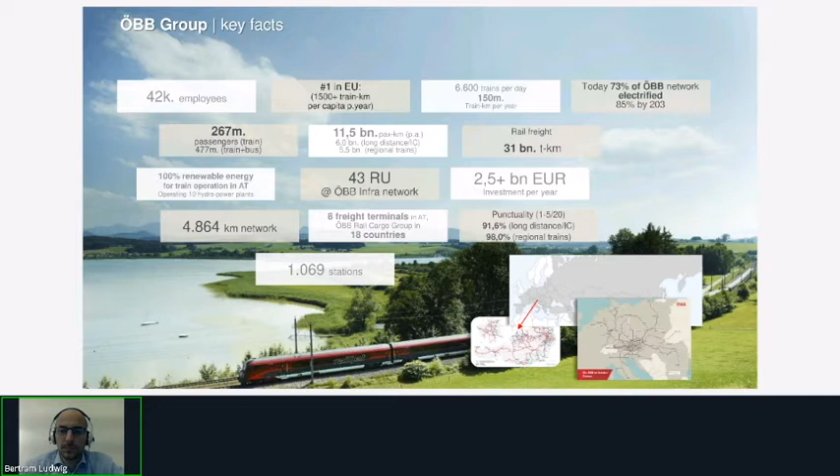On this picture, you can see our very large network going all over Europe in terms of passenger transport. And here you can see the countries where we are operating rail freight. As I said before, 70% of our railway network is electrified already. ÖBB is not only a railway operator, but also the biggest bus operator in Austria. We have about 3,500 buses operating, and we are searching for solutions in terms of buses. But we are mainly also searching for solutions in terms of railway, especially on regional railway lines.

We have a climate protection strategy until the year 2030. Our goal is to be CO2 emission neutral by 2030. How do we want to achieve these goals? First of all, railway electrification. That's what we are working on, and what we will increase. The goal will be 85% of our network by 2030.

We are searching for solutions in terms of bi-mode trains. As you can see on the left picture, this red white train is a bi-mode train from Siemens, which we have tested during the last years quite successfully, and it works for up to 60 kilometers without using its pantograph. On the right, you can see a hydrogen train, because we're working on some research and development projects where we try to green shunting trains for our freight system, as well as for our passenger transport.

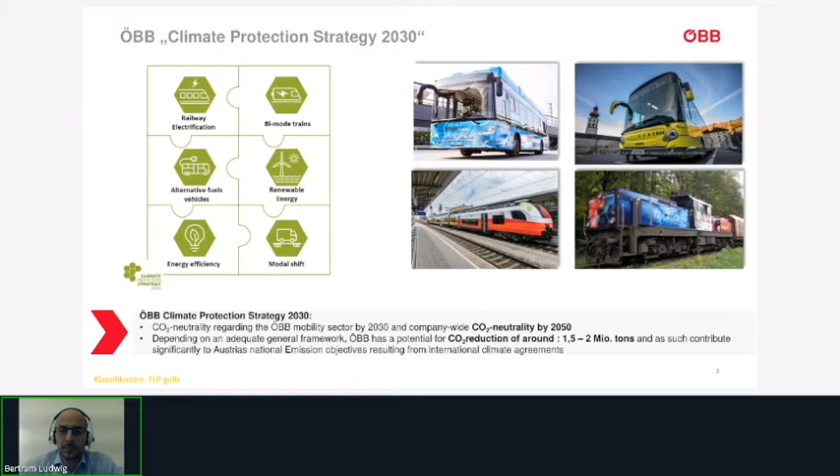So we have a very, very high goal: 2030 CO2 neutral in terms of mobility, and 2050 fully CO2 neutral. One of the tests we have carried out is a temporary test of a hydrogen train. We have been testing this train from the 19th of August to the 26th of November, so there are still a few more days left. However, I do have some bad news I will tell you later on.

However, we are testing these trains. You can see on the map of Austria here. We're testing these trains in the region south of Vienna. It's a very hilly region. It's an alpine area, actually, because until now, these trains have been mainly operated in the north of Germany, where it is flat. But it's the first time ever that these trains are operated in a hilly alpine area.

The area where this has been operated is a track which is 130 kilometers, so battery vehicles are not an option. We have tested one of the trains, and it operated daily up to 500 kilometers per day. But we have not only tested the train, we have also used a temporary fueling station for hydrogen. So we prepared all of our garages for that, and the entire railway station.

The Austrian Federal Railways is actually the first bigger railway undertaking testing of hydrogen trains. As I mentioned before, we are testing these trains mainly in alpine areas, which are currently mainly diesel lines. And it not only includes the train itself, but also the fueling station, maintenance of the train, and logistics. The goal is to gain knowledge about the train and to draw a path for how we can achieve the goal of 2030 CO2 emission free.

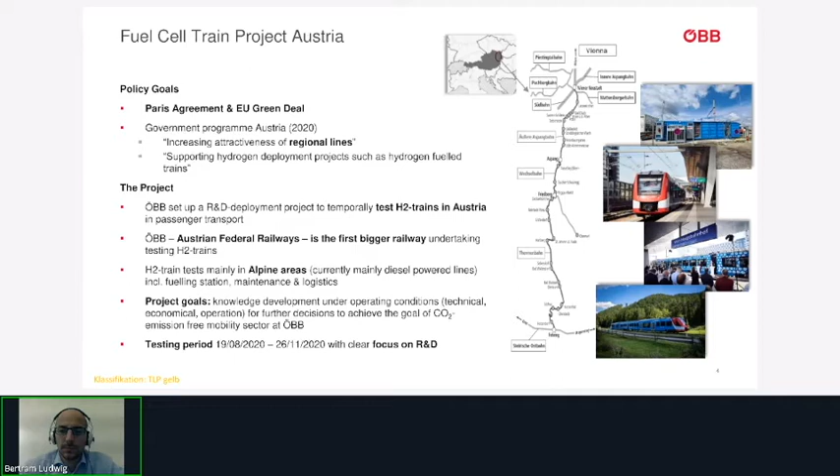An interesting aspect is that we have also applied for a full admission in Austria, and this train now has a full admission in Austria. The first results of this test have shown that the range is up to 500 kilometers per day. So that's a check in terms of comparability to diesel trains. It's reliable. The fueling is easy and fast. We have high acceptance among train drivers and customers, and we have full Austrian admission.

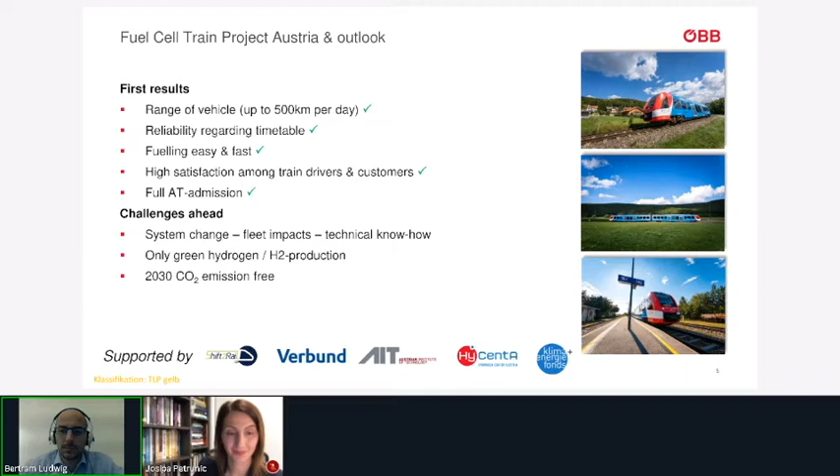But there are challenges ahead, such as the system change. It has a fleet impact. Technical knowledge is demanded, and we only want to use green hydrogen and green hydrogen production. And this is actually the biggest challenge we face currently in Europe. I'm very eager to learn what you in Canada are doing, because we do not have enough green hydrogen at the moment. But we want to achieve the goal of becoming CO2 emission free in 2030.

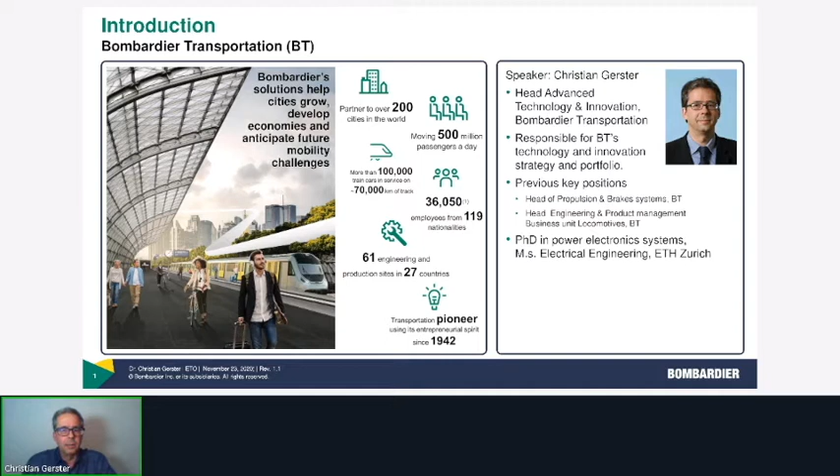Starting with a short introduction, I will not talk too much about Bombardier Transportation, one of the bigger players as a rail OEM and also operator and maintainer. My background personally is in propulsion and brake systems, so a bit directly connected to the subject, and formerly I've been managing the product management and engineering for the business unit locomotives.

Going into the subject, I would like to start with a short comparison of all the alternative propulsion and electric propulsion being, I would say, the backbone of today's modern fleets in railway. But if we specifically look into battery electric and hydrogen fuel cells, we immediately see key differences when we compare a number of aspects from power generation over distribution to the vehicle, resulting in different primary to wheel efficiencies.

First point, a fully electrified railway system has the highest energy efficiency from primary to wheel, wherever the primary energy is coming from. Technology readiness is fully there, fully established, and even local emission and NOx is locally zero for electrified. If we compare to that as a reference, battery electric trains are close to it in energy efficiency, close in technology readiness, and even in the environmental aspect with locally zero emission for NOx and CO2.

Depending on the application conditions and degree of existing infrastructure, it has lower or slightly higher total cost of ownership, looking to the rolling stock. And typically infrastructure is at a similar range, like a kilometer electrified compared to charging stations, which battery electric trains might need.

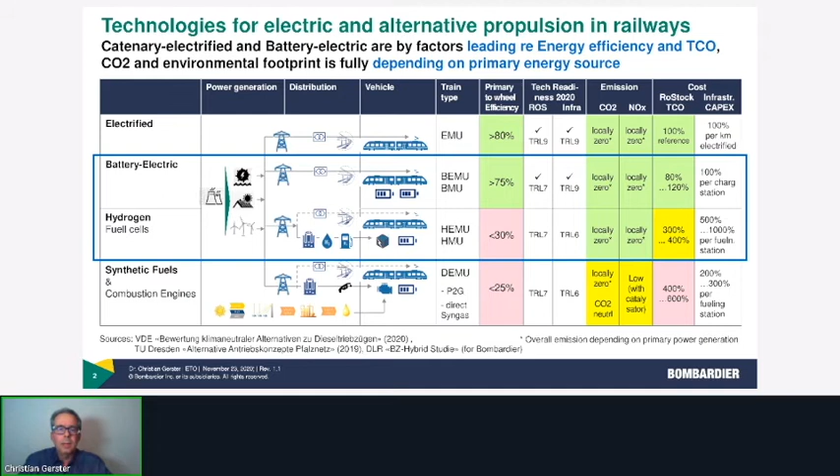So if we go a bit deeper and compare directly battery traction versus hydrogen hybrid, and that's what I mean with a reality check, we see a substantial difference. Correctly mentioned, above 100 kilometers it very much depends whether it's feasible with battery traction as an autonomy range, depending on the topography and the line characteristics. But you can for sure scale battery traction today up to 200 kilometer range.

Hydrogen hybrid, much higher. We assume 600 to 800 kilometers, depending on the tank size, which typically allows refueling not every day, but only every second day. Typically we would assume it's not automated, while electrical recharging, even with today's technology, is fully automatic. The second big difference is the fueling technology we are interested to learn about, and how the related safety standards for a rail application will develop.

The transport infrastructure is essential because it contributes to the energy intensity and energy use for a hydrogen system. All in all, it results in a substantially higher TCO. We see a factor of 3 to 4, and CO2 for sure depending on the primary energy quality.

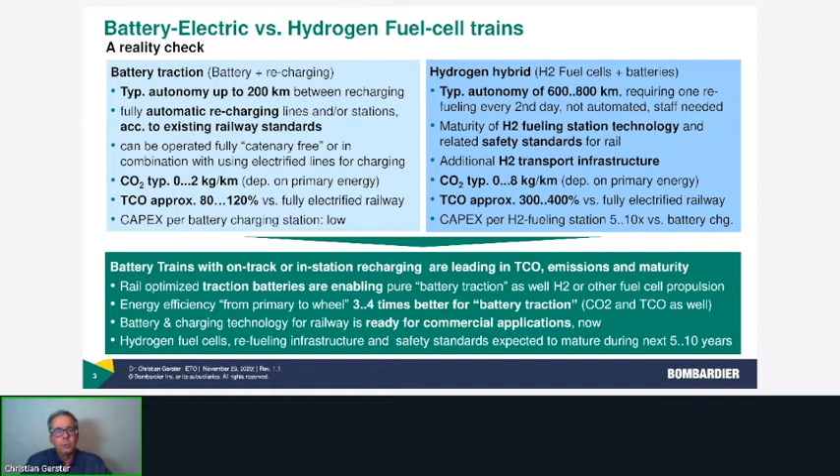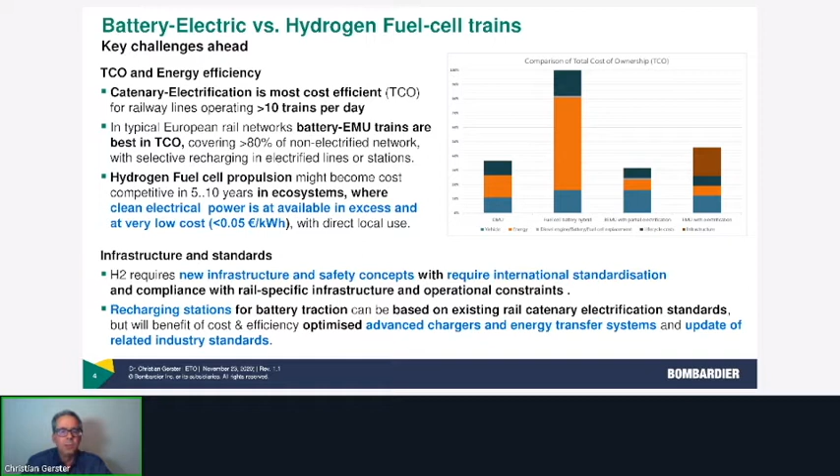We see that limit or threshold around 5 euro cents per kilowatt hour, not more. And for sure, hydrogen requires new infrastructure and safety concepts and some international standardization, one of the key challenges. The same is valid for recharging stations for battery traction. However, they are based on today's standards, evolving for charging of batteries. Last but not least, I would say the difference is battery traction for a railway is real and available today, whether for new rolling stock or as upgrade, while hydrogen might become a niche, but has a way to go.

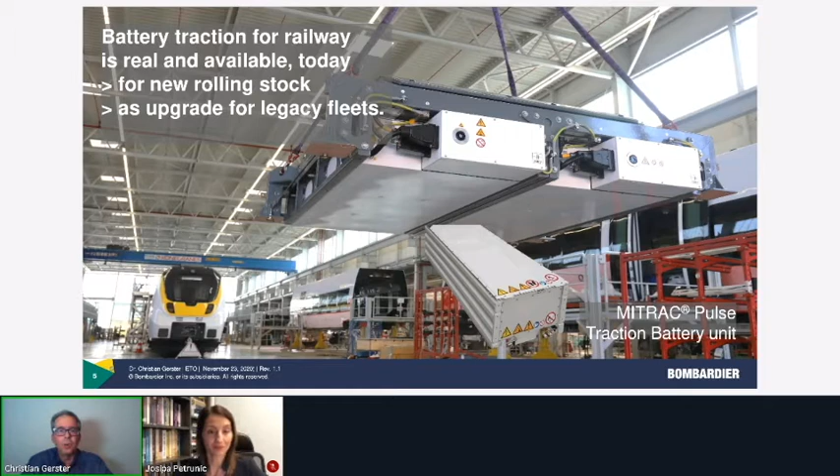Thank you so much, Christian. That was very helpful. And so, given that the panel is entitled Hydrail, the future of rail electrification, it sounds like you're saying Hydrail is not primarily the future of rail electrification. It's really battery-based, direct from grid electrification of rail, with Hydrail potentially having a place, a non-obvious one right now, non-obvious ROI, and some very serious infrastructure and standardization issues at play.

So we're going to come back to that because, of course, Bombardier is a very key component of the rail manufacturing sector in Canada, and with the purchase of Bombardier by Alstom, that's raising a lot of questions as to what the future of this rail manufacturer looks like, and is this going to change at all? So we're going to come back to you, Christian. There are several questions already lining up for you as a representative of Bombardier.

With that, I'm going to turn to our third panelist, Rob Campbell. Now, Rob, I understand your camera has gotten a gremlin into it, so it looks like you're upside down, and we've never seen that before, but there's always a first time for everything. I won't take a screenshot and tweet it, or maybe I will, but you'll have good fun with it, as will I. So we're going to keep your audio on just because it's a little bit distracting to see you upside down, and hopefully we can sort that. And I understand it's not your camera that's upside down. There's some kind of communication between your camera and the platform. So we'll deal with your audio, but we know what you look like, Rob.

So over to you. And just to introduce Rob Campbell, for those of you who aren't as familiar, he's Chief Commercial Officer at Ballard Power Systems Inc. And of course, Ballard has been one of our founding members for many years as we've been trying to motivate this industry on the bus side. But here today, we're here to talk about rail. And I have to say, the picture that Christian just painted is very different from the picture that came up during our national consultations, where Hydrail was positioned as a possible short-term ROI opportunity.

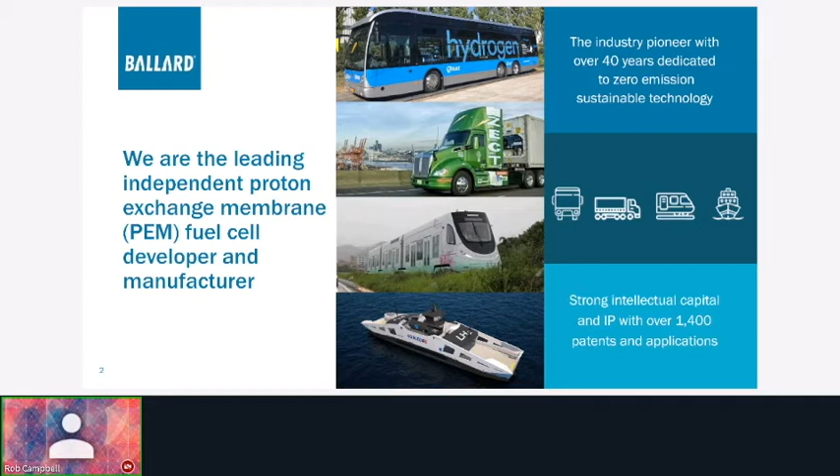Now, let's focus on fuel cell powered rail. It is a reality, in my opinion. We have operational hydrogen trams in China. We are also supplying systems for the fuel cell version of the Siemens Mireo train for projects in Europe.

And hot off the press this morning is an announcement by Siemens Energy for their first hydrogen train. The announcement is titled Deutsche Bahn and Siemens Enter the Hydrogen Age, with a project in the state of Baden-Württemberg in Germany. Very well done.

We also have fuel cells in use with the UK Porterbrook hydrogen prototype train and are seeing strong interest for hydrogen-powered rail projects globally. These systems are powered by building blocks of 100 or 200 kilowatts, depending on the application. We leverage the designs coming out of our bus and truck applications in order to deliver volume economics, as well as proven, durable, and reliable performance to the rail sector.

Products undergo specific rail tests in order to secure rail system homologation approvals. Our modeling and operational experience is showing attractive economics with the use of green hydrogen as the fuel, hydrogen that is generated by renewable energy resources for zero carbon impact. While this has been a relatively quick development, I can confidently say that fuel cell powered zero emission rail is safe, durable, reliable, and affordable.

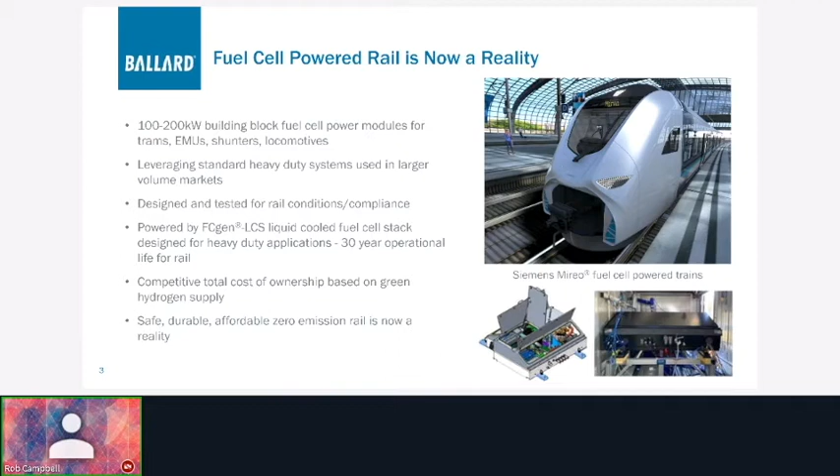But let's look further. In this next slide, what I'm showing here is the vision to link 10 European countries together with a network of hydrogen pipelines in order to connect large-scale green hydrogen production, even as far off as Northern Africa, to demand. And with this pipeline network, we can provide secure and cost-effective supply.

This initiative, known as the Hydrogen Backbone, is the collaborative effort of 11 leading European energy providers and shows how the overall plans for decarbonization are shaping up in Europe, providing a strong example for the rest of the world. So, green hydrogen will be available and economical. And this is also the conclusion of reports by McKinsey and recently published by the IEA. So this is independently validated. Of course, it takes time, it takes effort, but this is the clear direction.

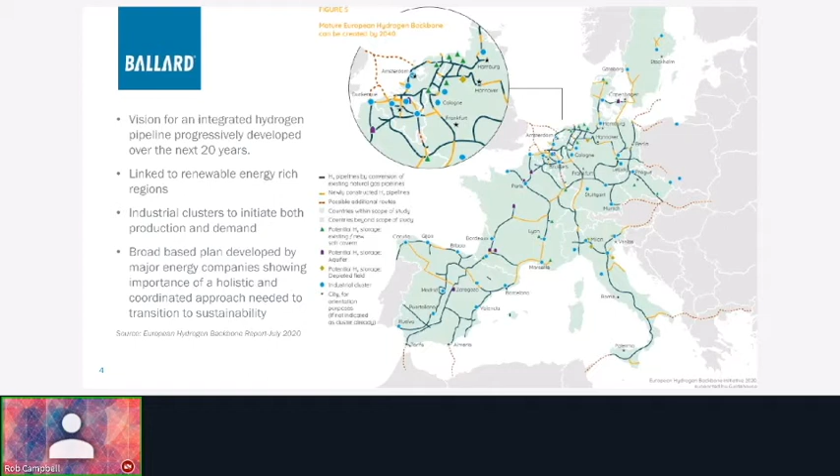So where exactly are we? Europe leads with the adoption of hydrogen solutions for rail, and initial trials are quickly migrating to series production trains as the new zero-emission standard. As with any new technology, we need to practically interface with the codes and standards developed over decades for rail. We need a pragmatic approach to homologation, and this is what we have seen thus far with initial trains. We need to underpin this exercise with green hydrogen as referenced, and major commitments for this are happening in Europe.

Now, this green hydrogen, it ties back to the total cost of ownership. The key input to total cost of ownership is the cost of this hydrogen. And when I reference these reports, the cost of hydrogen is plummeting in the forecast that we're seeing and is actually rapidly changing in the projects we're participating in. And the projection for green hydrogen is that it will be in the $2 a kilogram or less range by the end of this decade. And there are projections of close to $1 a kilogram within the next 20 years.

So this changes the total perspective. And when we talk about TCO and economics, what we're concerned about is the cost per kilometer, the cost of the total system. And this is where, with the low-cost hydrogen, it actually makes sense.

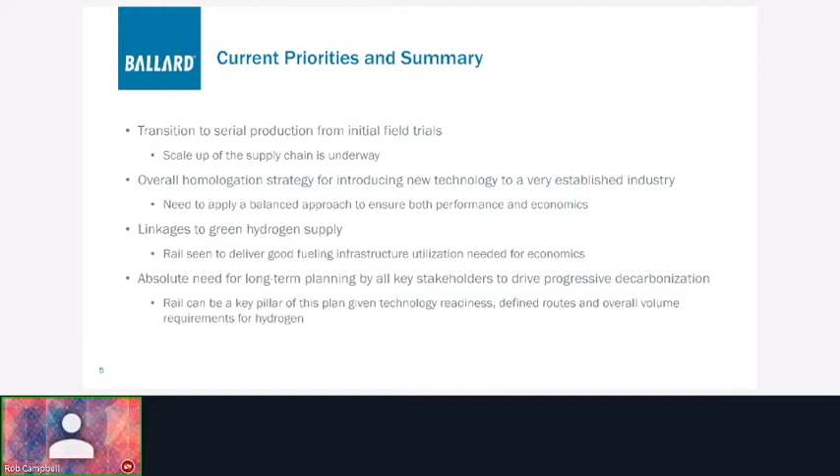And finally, this is all part of a master plan to decarbonize our planet. And we all have an important role to play as our respective industry and government champions to drive positive change as soon as possible. Rail is very important and will be a first mover in this critical transformation. So let's all get on board for the new way to electrify and decarbonize with hydrogen-powered rail.